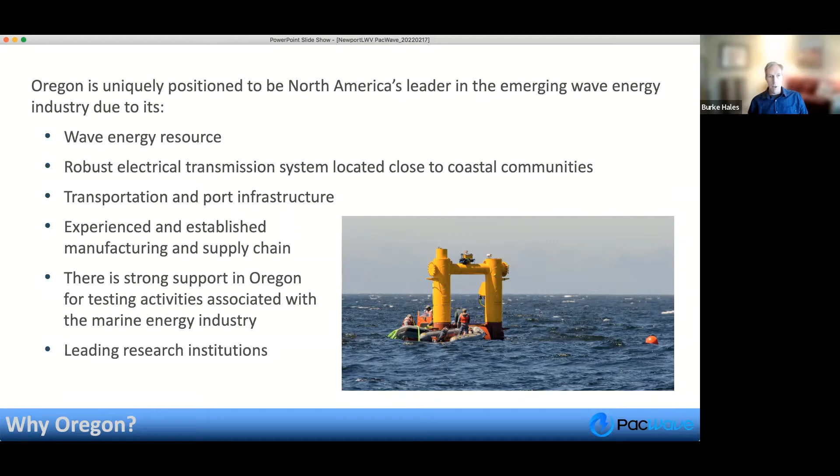And on top of that, we've got leading research institutions here, primarily Oregon State, but also Portland State, and we've got affiliations with University of Washington, University of Alaska that help us work on these problems.

So historically, we've been doing this - and I'm using 'we' very generously to myself, I wasn't doing this since the early 2000s, but Oregon State has been doing this. There's been tens, now exceeding $100 million of R&D, research and development funding, primarily from DOE, but not exclusively. There are a number of wave energy production companies that came out of OSU, and the intellectual property that was generated at OSU: C-Power, Harmonics, M3 Wave. We've done a couple of the exclusive-to-us within the continental US wave energy deployments.

At our north site, NWI and Azura were the companies that worked there. Lots and lots of PhD and master's students have come out of these programs, and these students are actively hired by the industry, but also the national labs and other academic institutions.

Many different projects and 20 device and research organizations testing at PacWave. It's interesting that coastal stakeholders seem to be quite supportive of wave energy—maybe not quite as supportive as solar or wind, but much more supportive than geothermal or hydro power. And there's strong support for expanding wave energy production.

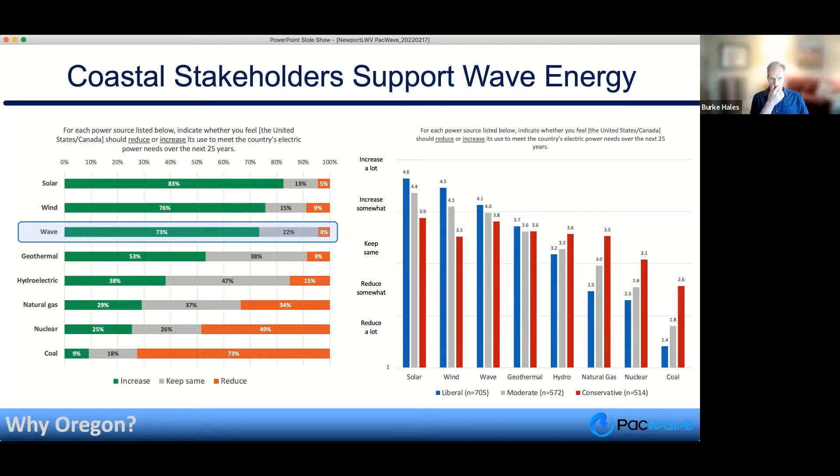Okay, so how do you do it? We're in a formative state, and that's really important to think about.

I'm teaching right now—I think, with maybe the exception of Katie, I might be the youngest person in the audience here. This isn't typically the case for me.

I can remember in the early days of wind energy that the different types of devices and turbines were highly variable. There were vertical turbines that looked like streamers, many-vaned windmills, enclosed turbine style approaches, and hooked blades in these devices—you'd see them randomly in places where somebody was taking a risk to try this. Now if you drive into the gorge in Eastern Oregon and see the huge wind farms there, every single one of those devices is almost exactly the same.

If any of you have been lucky enough to go to Maui and see their big wind farm installation across the bay from Kihei, they're exactly the same. The reason those devices are all the same is because they've had 20 or 30 years of testing and optimization. Whereas if you look at these wave energy devices, it's a hodgepodge of wildly different things, and in some cases almost cartoonish.

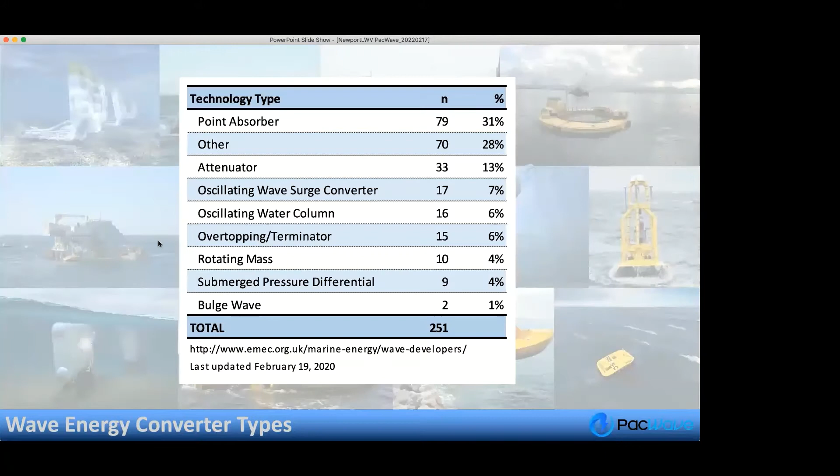We've got names for them that I don't necessarily find that informative: a point absorber, an attenuator, an oscillating wave surge converter, an oscillating water column, rotating mass, etc.

There are many different ideas about how to capture this energy, and a big piece of this is because no one's really been able to do detailed testing and optimization. We anticipate that some of these devices and approaches might just not work, but we don't know that because there hasn't been this rigorous testing.

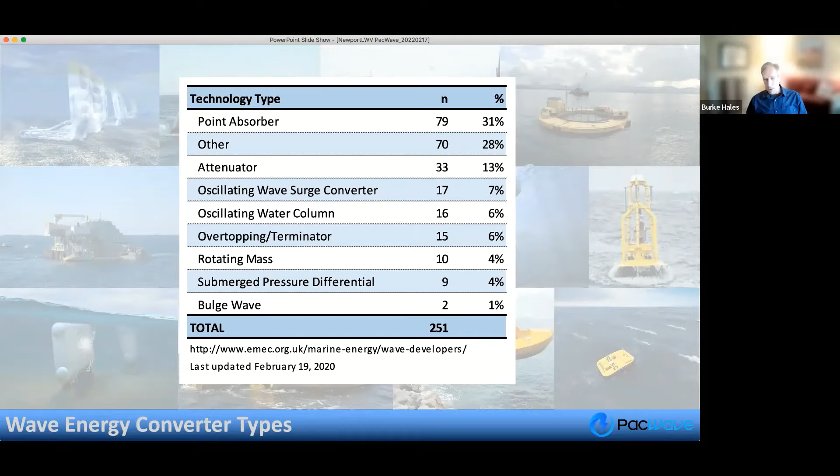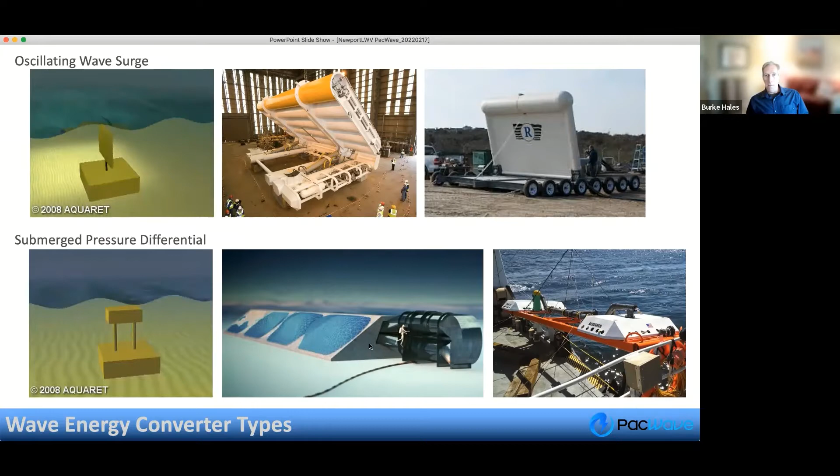It uses submerged pressure differential - as the waves go back and forth or sequentially over a device, the pressure field changes, and so you can drive pistons up and down like this. These are membrane driven, sort of like the opposite of a membrane pump that I'm sure you've all had some experience with.

Yeah, Jean, I see your hand up. Thank you. Just as we go through some of these, I'm hoping that you will touch on - I was in the legislature from 2007 to 13 when we were mostly focused on wind, but certainly in ocean devices.

Especially from the stakeholders' perspective, the concern was whether any of these would actually survive in open ocean in the difficult weather conditions that we have. And then also, how much they would be seen from the shore as far as view sheds and that kind of thing. So I'm wondering about the testing on their stability, and if they fail or go away, the requirements for recovering the device itself.

Yeah, so in my opinion, being a seagoing person and a pretty avid participant in pursuit of fish and crab in the coastal ocean here, I'm highly sensitive to how abusive the ocean can be. In my mind, that's one of the really important aspects of this test facility - the seaworthiness of these devices is critical. There are many ways that you can project the performance of these things.

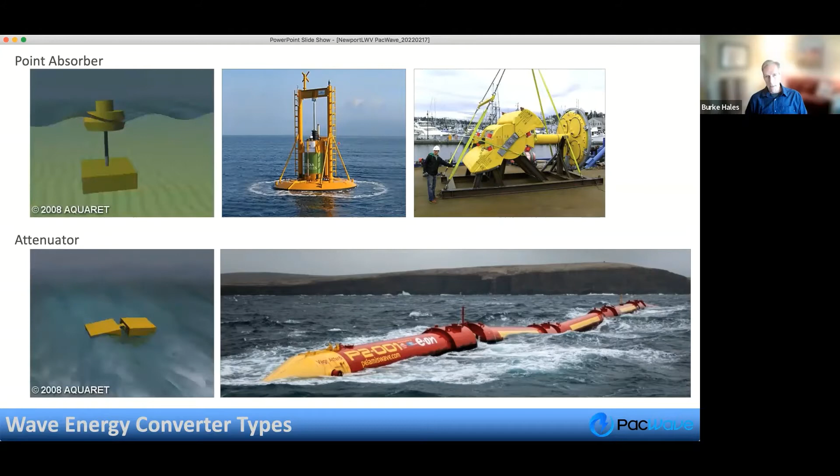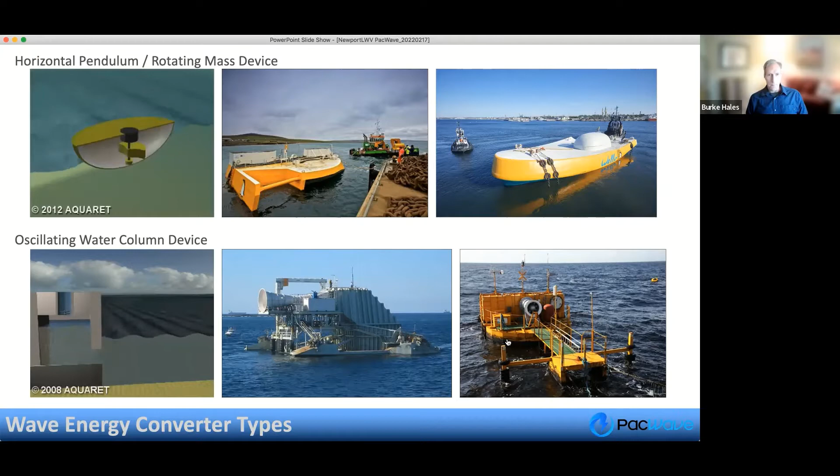This device right here, I'm going to show you it in the shipyard up in Portland, and it looks like this horrendously big device, but almost all of this device is under the water. So this comes back to your viewscape question. Here it is right here, right? So they haven't put the turbine on, but basically everything that's not yellow will be underwater. This opening here, that's the water column where the wave oscillation drives the pressure fluctuations, and up here is where the turbine is mounted for the compressed air to push through.

This is at the Vigor shipyards in Portland, Northwest Portland, where you see the big gantry crane.

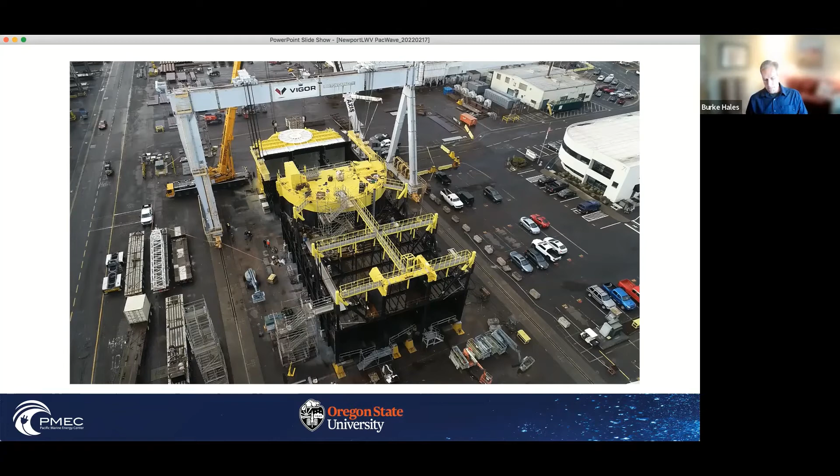All the devices I've shown you so far are focused on grid scale power generation, but there are lots of other reasons to generate wave power. We call these maritime markets, effectively smaller scale, isolated power systems, and they can do things like recharging underwater vehicles, desalinization, aids to navigation, ocean monitoring. One of the big things that's happened recently is that big data companies, Microsoft, Google, et cetera, are thinking about how do we protect these big data repositories, and how do we keep them cool.

Putting them underwater is one of their ideas. These big devices sit out 100 feet below the water surface or something like that, and they've got energy requirements, and maintenance is really important for that. Aquaculture, supporting offshore aquaculture facilities.

You could consider making fresh water, generating hydraulic pressure to do algae cleaning, mitigation. You could actually make ice with these devices. Constructed waterways, you can use devices to actually generate... I've lost the word, dredging effectively.

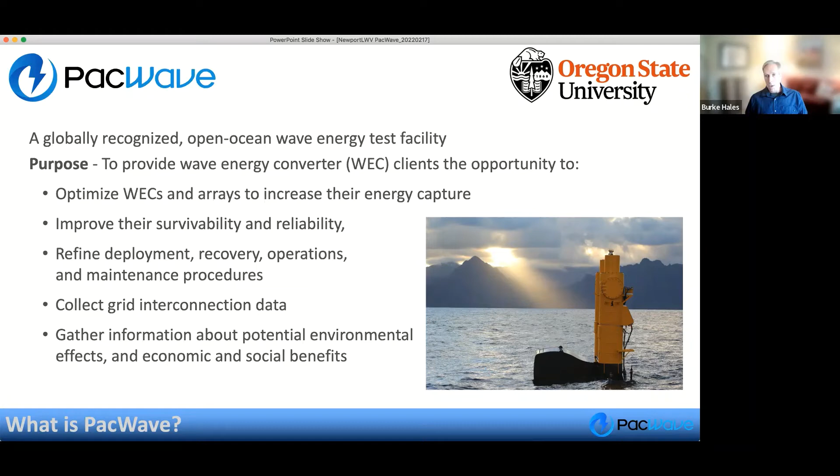We think they're probably very likely to attract fish. Is that a good thing or a bad thing? Are we introducing artificial reef-like structures in an area where they don't typically exist? I can guarantee there's almost no lingcod at this site, and there will be some once we start putting these anchors down. So we've got a huge monitoring responsibility to quantify these effects.

Okay, so we have two sites. We have PacWave North, which is in state waters, about 3 miles off of Yaquina Head. If you were to walk up to Yaquina Head and a device were out there, you could see it.

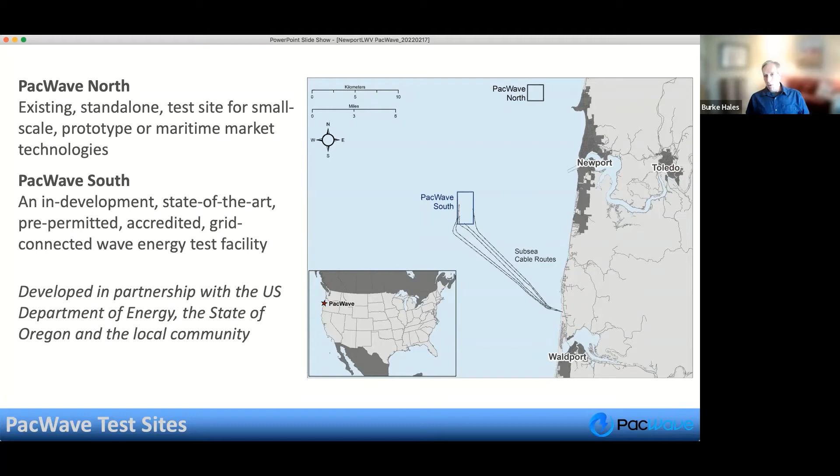Basically, all of this from OSU has been funded by the Department of Energy. There's been some support from the U.S. Navy for building autonomous power production and storage systems. But if you were to look at the dollar percentage, it's almost entirely DOE, with significant contributions from the state of Oregon, Oregon State University, and a couple of private foundations and donors.

So focusing on PacWave South, which is the one that is under construction right now. As we said, the inshore edge is 7 miles offshore in a straight line. We're west-southwest of Newport, about 10 miles.

Within this test facility, we'll have 4 separate test berths, each with their own subsea power and data cable, each cable capable of carrying up to 5 megawatts of electrical power. So ultimately, potentially a total of 20 megawatts of power production, and we're permitted for up to 20 devices.

These big devices — you could get maybe 4 of the really big ones in there, but there's a lot of discussion about whether a single big device is the best way to go, or if several smaller devices that capture smaller wave energy and are networked together is better. You sort of think of it as a swarm of bees as opposed to one big angry seagull. So, 20 total devices, 20 total megawatts.

The cables that run from that site land right here at the Driftwood Beach State Recreation Site, and that's where we've been working since July 1st of 2021. Ultimately we'll grab those subsea cables, convert them to terrestrial cables, and run them up to our shoreside power conditioning facility, which we call the UCMF — the acronym for Utility Connection and Monitoring Facility.

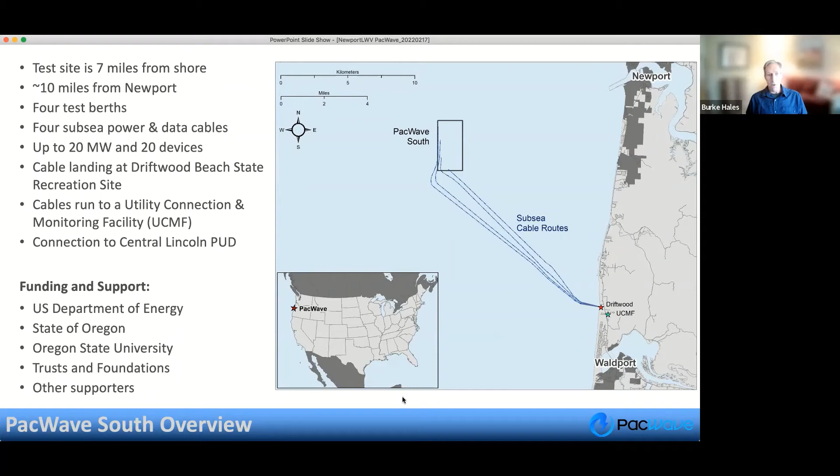So where are we? Well, this puts you into the Wayback Machine. Anybody remember 2019? Things were different, but even before then, starting in 2011, OSU folks led this — at that time, was it Belinda leading, or was this Bob that was on point? What year — 2011? 2011 was Bob, I believe, and then Belinda was shortly thereafter.

Even if we go back before 2011, a faculty member here, Annette von Jouanne, was the real instigator of wave energy research at OSU. Bob Paasch took over as lead of the Pacific Marine Energy Center, and then handed the reins off to Belinda Batten, who certainly by 2012 was on point here. Kaety worked closely with the team early on, doing feasibility studies, preliminary designs, and the application for a research lease to BOEM, the Bureau of Ocean Energy Management — I believe there was a 'mineral' in there too, Ocean Energy and Mineral Management.

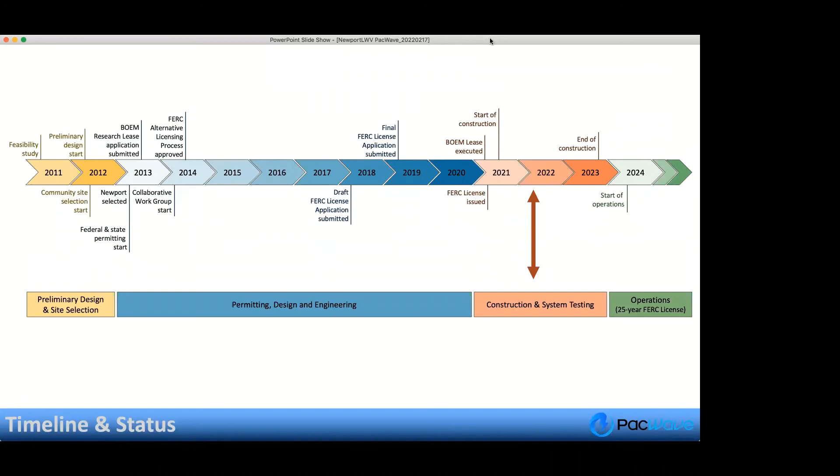That was to look at where to put sites for marine renewable energy as well. So there was the potential for multiple areas to be given or set aside for this. I think not just the Fishermen Involved in Natural Energy committee, but the community—because we had a community siting team as well—really felt like they didn't want commercial development at the time. They felt the economy of Newport is around testing and research, so they wanted that testing and research site. I think they were willing to give it up, because they also felt like maybe they'd be a little bit protected from the territorial sea plan process if they had said yes to this and wanted more.

We should also point out Bob Etter certainly played a really constructive role in this process. We don't want to forget him, and probably a number of folks that I have forgotten.

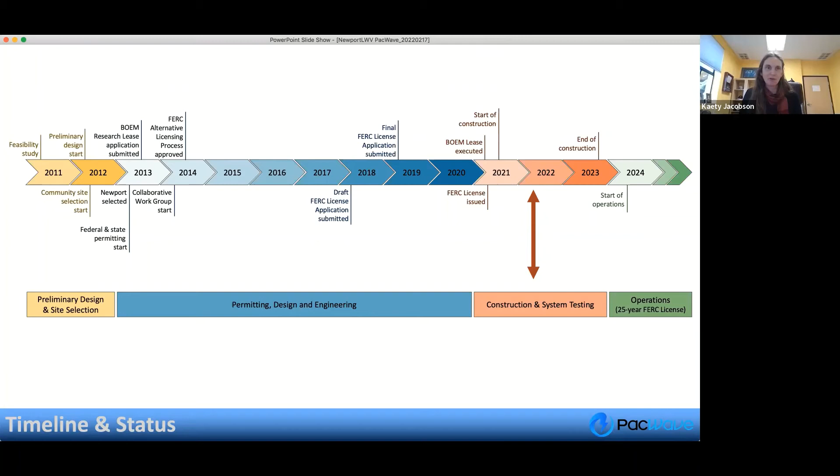I did bring a lot of pie. It's one thing that virtual meetings with our FINE group is we can't have pie. Yeah, well, right when I started was one of the last FINE meetings that we had. Those fishermen, they have other things to do than sit around and meet with us, and they're a hard group to grab, particularly in the fall when they're getting ready for crab season. So I came to one FINE meeting where I bought the pies, and I'm disappointed because I'm a pie maker and I'm a snob about pies, and we've never had an opportunity to have a meeting where I can actually provide homemade pie. So Kaety, if that's motivation—or maybe they don't trust my homemade pie. That's pretty good motivation. Belinda used to do that. I have never done that for the FINE group. I always bought them, but yeah, let's do it. All right.

So let's move on. Here we are in early '22, well into the construction. We hope to be wrapped up with construction by the end of summer '23, so that we've got about 6 months for what we call burn-in—testing the cables, making sure the facility is operational in the shoreside facility—and then operations in 2024.

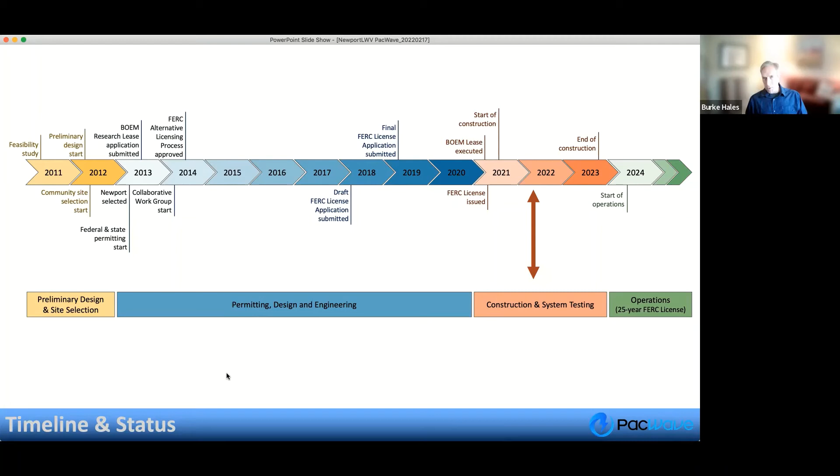Okay, so where are we? Well, the permitting's done. We finally got the full execution of the BOEM lease on February 16th of '21, even though we got the news that it was going to happen on January 19th of '21.

We got the FERC license finally issued on March 1st of 2021 with a construction authorization date of May 18th. We started construction, moved trucks in, started clearing out the parking lot on the 1st of June, and then really got going with doing the underground construction on the 1st of July.

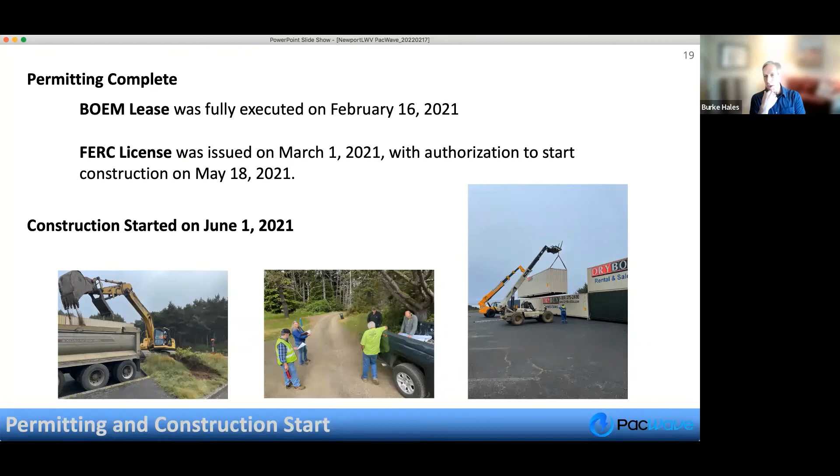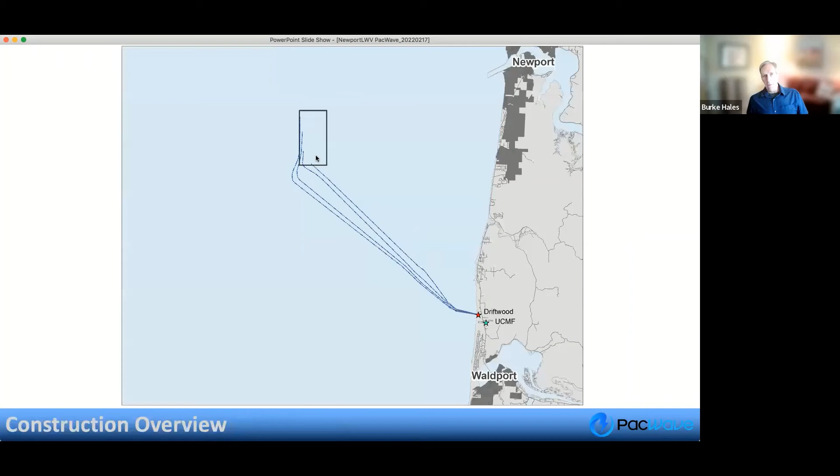The construction overview: here's the site out here off the airport, here's Driftwood Park, here's our upland site here. What we're just wrapping up is this, we call it HDD, which stands for horizontal directional drilling. That's work where we started at the park and drilled 4 conduits out under the seafloor that outcropped at about the 50-foot depth here. Drilled tunnels, pushed conduits in, and we just wrapped up this yellow line here that goes between the park and up to our upland site, which is down south of Seal Rock.

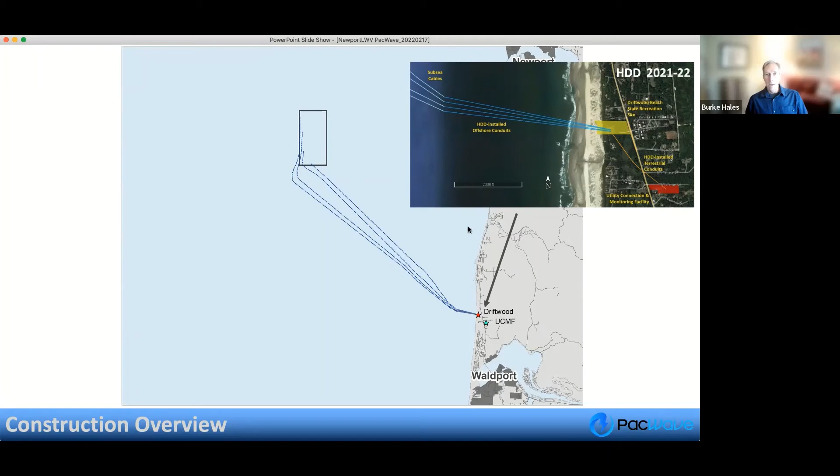We hope to be started building this upland site, this UCMF, starting this summer. We hope to have requests for bids out in a month or two, and awards made by June, and hopefully contracts in place by July, so that we can get started on this construction.

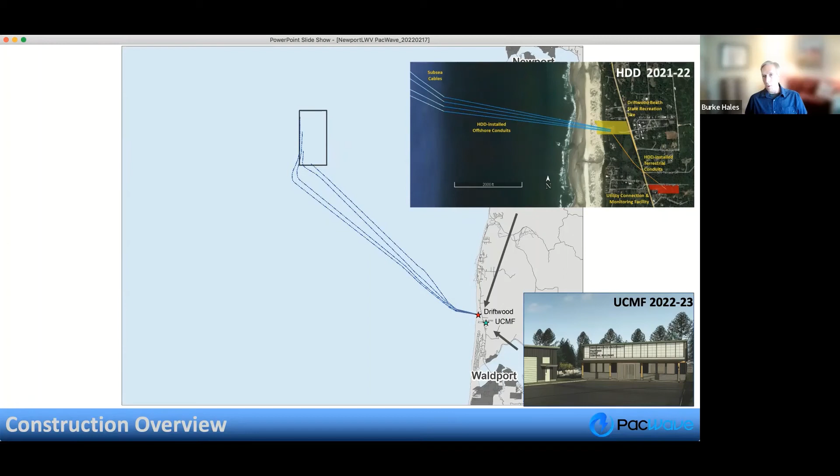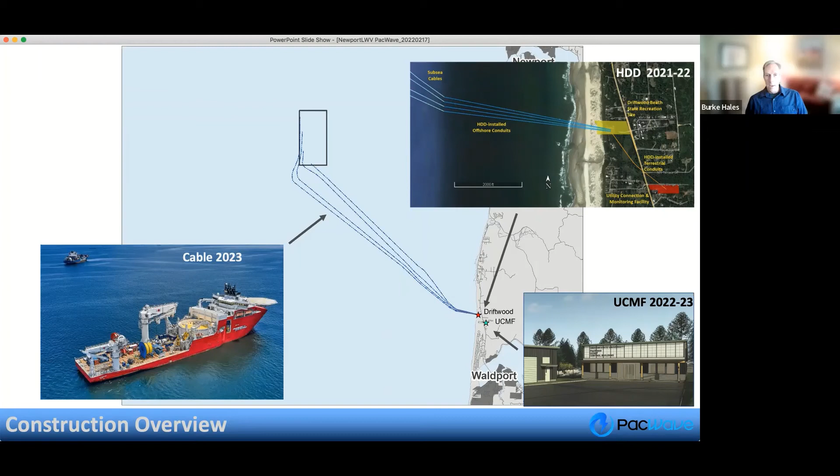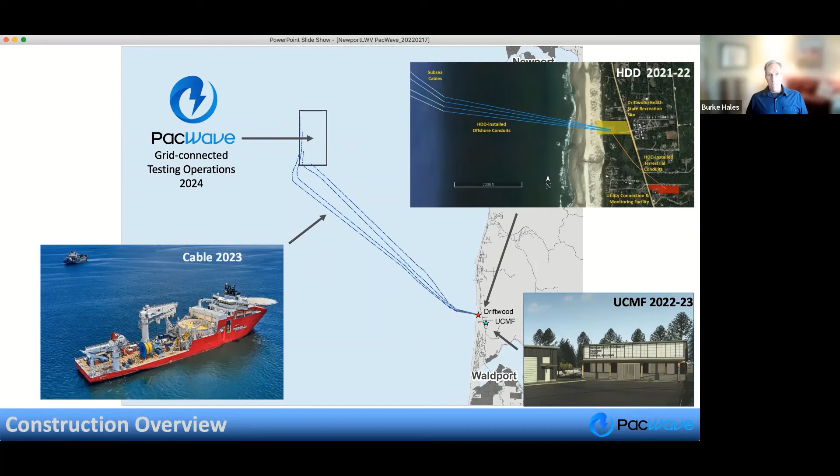Next summer, we've got the subsea cables coming in, and this is a highly specialized operation. There are basically no vessels on the US West Coast that can do this work, so we're dependent on a vessel that's going to come through the Gulf of Mexico and out through the Panama Canal and up to our coast to do this cable laying work. Hopefully, as we said before, we're doing grid connected testing by the summer of 24. So that's the big picture timeline.

Where we are now is we're just wrapping up this underground construction. Starting here at the park, we drilled 4 underground bores. They got as deep as 150 feet below the seafloor. We drilled underneath here. Each one of these, prior to doing this work, would have been a record for the length of what they call a shore landing. Each one of these is a little over a mile long, and they outcrop right out here, just beyond what would be considered the surf line.

One of the other pieces about this that's really critically important is that Driftwood coincides with one of the few gaps in the shallow rocky reef system off the coast there, that many of you have spent time out there - really great rockfish and lingcod fishing habitat. We didn't want to disrupt that. It's challenging to work in that area, and this is one of the reasons why Driftwood was chosen. So these outcrop here, sort of in an opening between the rocky reef systems, and ultimately the cables will be installed in these conduits and laid out seaward to the test site.

This part here, we just finished up this drilling, going underneath the park property to the south of the parking lot. This was a choice that we made because we felt it was lowest environmental risk. One of the earlier plans that we had was to trench out the access road under Highway 101, then along Highway 101 to the south, and then up the access road to our property here at Wenger Lane.

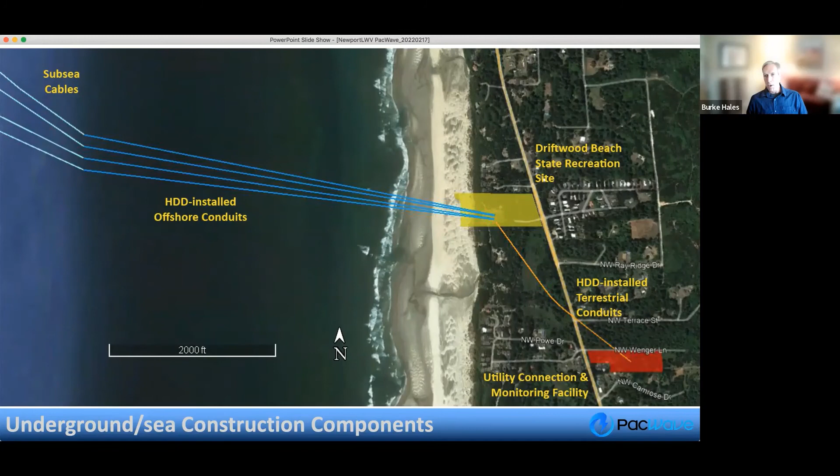Lots of challenges here. If we were doing it this way in the first place, we would trench across several of the creeks that feed this wetland. Also, very dense utilities in that margin along Highway 101. And I'm sure you all love when you get construction on Highway 101, and this would likely happen in the summertime when traffic is the most excellent. So this underground drilling was viewed as a little more costly to the project, but it was viewed as less environmentally risky and less human disruptive than the trenching along the highway.

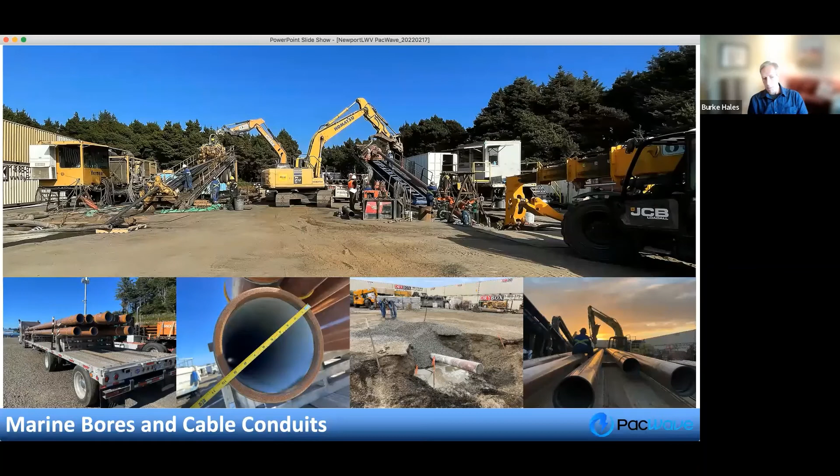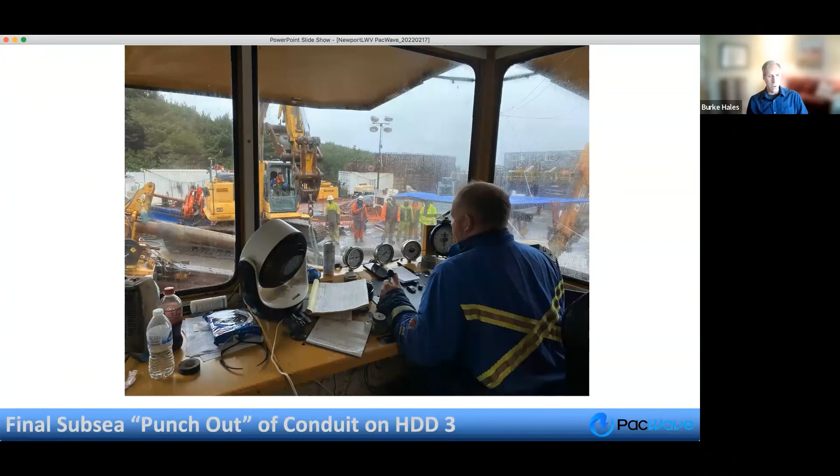This isn't as dramatic as if you had been there, but this was the moment where we punched through the seafloor to complete the final seaward bore. You can see we didn't manage to finish in nice summer weather. Things were getting a little windy and rainy and muddy there at the construction site. But this is when we finished those bores and then started pushing the conduits in.

You can see the pipe here. We pushed them in until they broke out through the seafloor, cut off the extending ends here at the park, and sealed them up. So these are waiting for us to build the vault where the cables will be connected and installed, and that's actually starting to happen right now - that vault construction.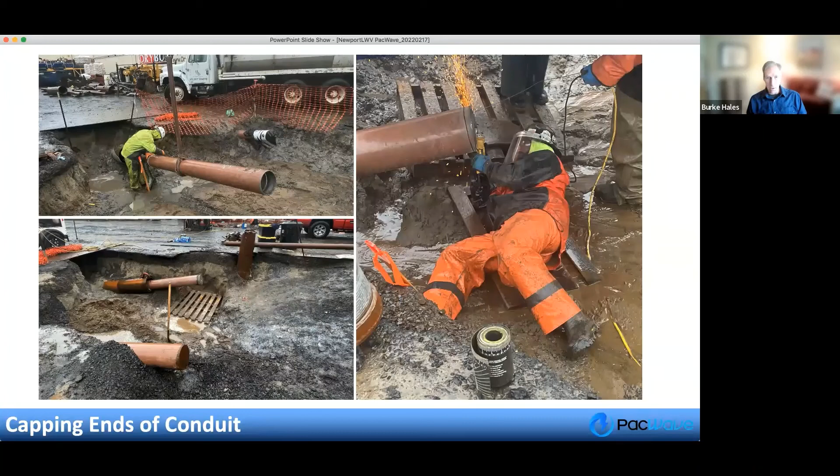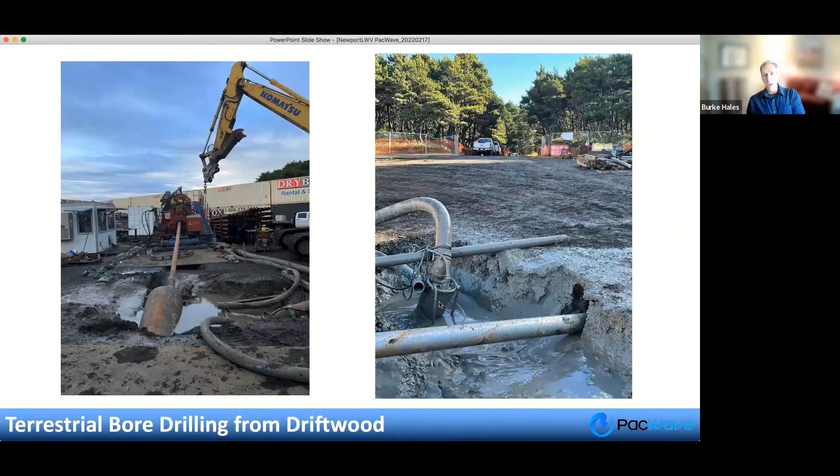When we did the terrestrial bore, we could go from both ends. So this is the driftwood site here, and we had a drill rig here. Up at the upland site, we had another drill rig going from up here, and we drilled.

This is the driftwood end, and with two drilling rigs we could come from opposite ends and connect in the middle. That turned out to be more challenging than I made it sound. Took a few tries before they met up. We had some challenges because there was some geology that our surveys didn't capture, where things got a little loose - seams of cobblestone and gravel - and it was a little harder to steer the drill bits in there, and harder to keep the drilling fluid contained to the bore. So we had a lot of stops and starts. We started this work right about the Monday after Thanksgiving, and we just finished it up about a week ago. So this bore, which was shorter and not undersea, and which we could access both ends of, took us about twice as long as each of the seaward bores.

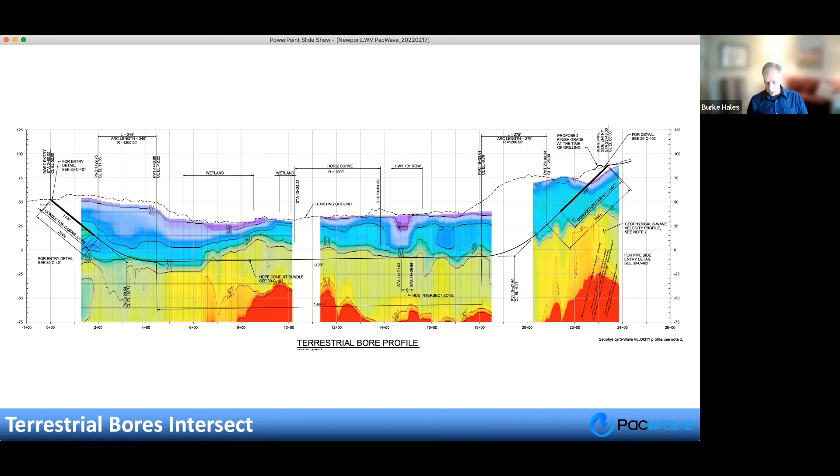So, you know, every time we thought we were in the clear, we had to shut down and reconsider.

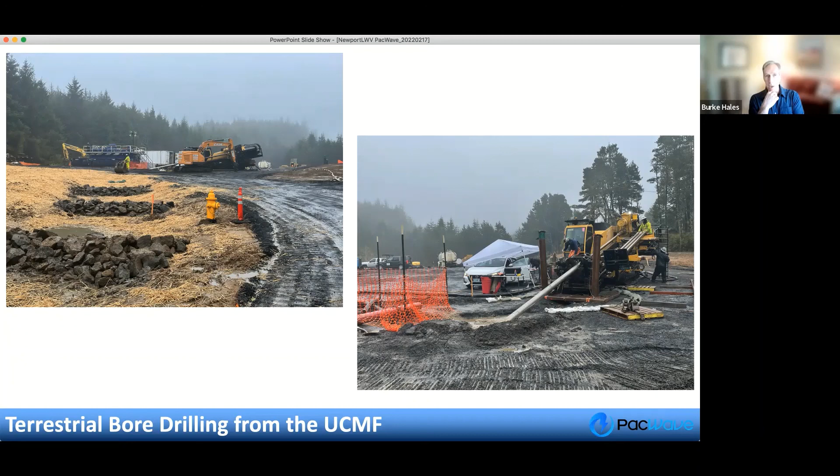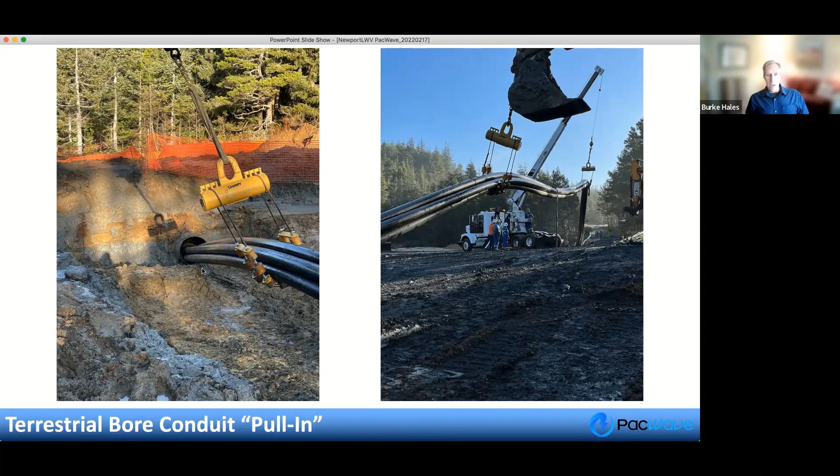As you can see, it doesn't ever stay that nice when you start getting into the fall on the Oregon coast. This was the drilling rig that we started from the upland side, and we made that completion. The conduits we put in here were poly plastic tube, and they were in a bundle as opposed to a single one. We had to very carefully guide them into the bore and pull them back down to the driftwood site.

And we just made that connection, I think two weeks ago today, about 9 p.m. on Thursday, the 3rd of February. Those conduits reached the Driftwood Park.

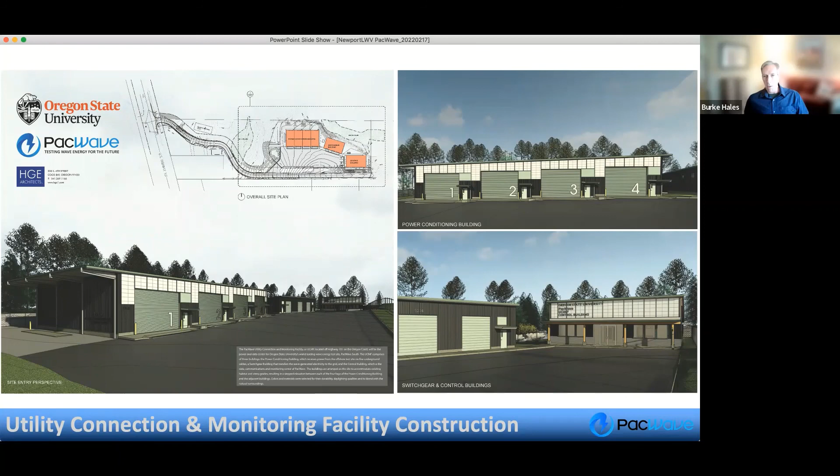The utility connection monitoring facility, that's the UCMF. We have an architect's drawing of that at this point, and like we said, we'll send these out for bid here in a month or so. It looks really nice - I'm sure it will look as nice when it gets done. It might not look exactly the same because these are conceptual drawings.

And then the last step is this cable laying operation. Like I said, these are very specialized ships that can carry four lengths of cable, each about 12 or 13 miles long. They lay the cable on the sea floor and bury it with a device called a jet plow. As they lay the cable, they're trenching along the sea floor, laying the cable in it, and then burying it back over.

The cable itself should be buried one or two meters deep below the sea floor to the best extent possible. If we run into unanticipated basalt structures or things like that, we'll have to do something different. We typically protect the cable with what they call cement mattresses, which will keep it from getting anchored on or dragged up or something like that.

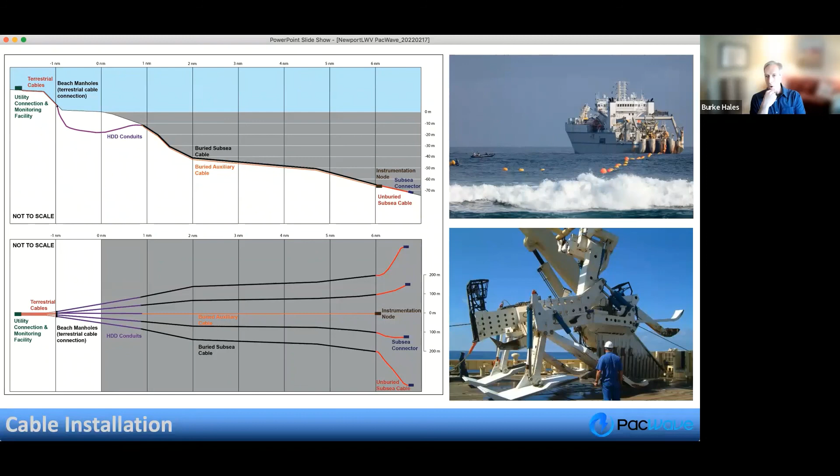And that's all I have. I know I went fast and gave you a lot of material, and I know it's 1 o'clock. I've got about a half an hour before I need to get to a thesis defense this afternoon, but I can stay around for questions if folks have them. I don't see any hands up, but let's open up the floor.

So, Georgia. Yeah, there's been discussion and I missed it, but being a sailor, my concern is, what about naval traffic, both commercial and pleasure?

Yeah, no, that's an excellent point. Part of the siting involved changing the shipping lanes coming into Newport so that the charted shipping lanes are now routed around to the west and north of the site. The other piece is that everything we do out there, we work closely with the Coast Guard to get what we call PATON notifications, private aids to navigation. They're all required to have a certain amount of lighting and announcement of deployment and recovery and position information.

The site itself will have corner markers at each of the four corners. The site is 2 miles in the north-to-south dimension and 1 mile in the east-to-west dimension. So it's not like there's going to be a set of LED lighted velvet ropes around there, but we will have lighted navigational buoys there. And the devices themselves will have lighting, and effectively they'll be on the AIS system - they'll show up as other vessels do on the AIS system.